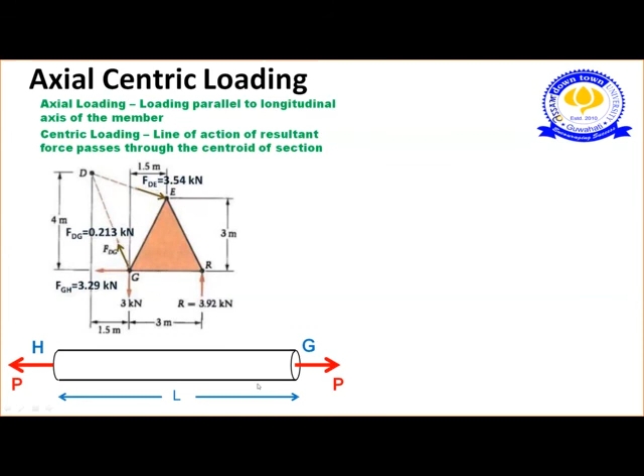In earlier classes, what we have done, we have taken a truss, right? We have taken out the truss. Then we have found out the various forces acting on this surface. You must have gone through this in your engineering mechanics class, how to take out these forces. That I won't discuss now. If later I get a chance, I'll give you some videos on that.

So we are taking a cross section from this truss member, suppose HG, and we are applying axial centric loading, which is our external force. Axial means perpendicular to this direction, and centric means from the centroid of the section. See here, this force is applied on the center. One more thing, centric doesn't mean always it will be from center, it will be from the centroid. A cross section may not have its centroid on its center; based on its shape, different cross sections will have their different centroids.

So we are applying a load from centric loading. Axial centric loading: axial means axially perpendicular to the surface, and centric means from the centroid. So we have applied the load. So this is our member. Now I'm interested in what internal forces will be generated on this cross section when we apply an external load. So first I did a transverse cut.

I have cut the section in the transverse direction, meaning perpendicular to the surface. So this is my transverse cut. So if I want to know what the forces are, there will be one normal force and one shear force. Between this section and this section there will be a shear force, and between this section and this section there will be some normal force.

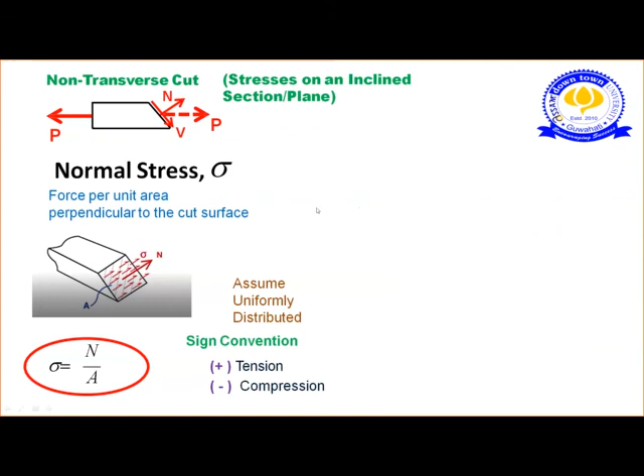And the sign convention: if the forces are in tension, the sign convention will be positive. For compression, this is the direction normally; this generally represents compression, and this represents tension, it is pulling out. So whenever the forces are in tension, the sign is positive. Whenever the forces are in compression, compressing, it will be negative stress. Clear?

Clear? Compression and tension. In truss, whenever you have found out the free body diagram, then the forces in different members, then you must have gone through compression and tension. So hope it's clear now. Any confusion from this slide, or shall I move?

32 participants joined, but no one is saying anything. What happened? Hello? Yes, ma'am. Okay. Only one girl. Okay. So I'll move to the next slide.

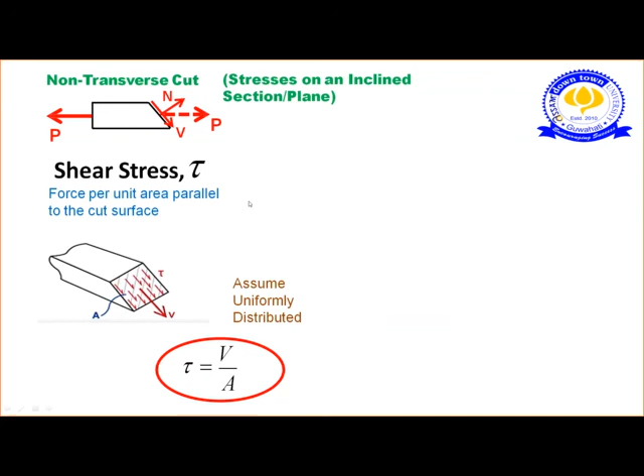So we have discussed the normal stress. Let's move to shear stress. So shear stress is represented by tau. Again, this is the shear stress. Now, if we zoom out the section, this is the shear stress. So force per unit area parallel to the cut surface. When the force is applied parallel to the cut surface, the force is in the direction of the cut surface. That force divided by the cross-sectional area is represented as shear stress, tau.

So tau is basically force per unit area parallel to the cut surface. Shear force divided by the cross-sectional area will give you shear stress. And here also we are assuming that the shear stress is uniformly distributed on this cross section. Or for this non-transverse cut, you can take it as stress on an inclined plane or inclined section also, because the cut section looks like an inclined plane. These two words will help you later on.

So first you have to understand what is normal stress, what is shear stress. Clear? I'll try to find any video on this. I'll share. So note down this question as a homework. Okay. I'll discuss the solution in the next class very briefly, but I want you all to do this one by yourself first. Then we'll match with everyone's answers. Then I'll discuss what problems you faced. Then we'll discuss how to do the solution.

So basically, a flat steel alloy bar has a thickness of 10 mm and a width of 60 mm. It is subject... My screen is visible to you? The worksheet. Hello. Yes, ma'am. Okay.

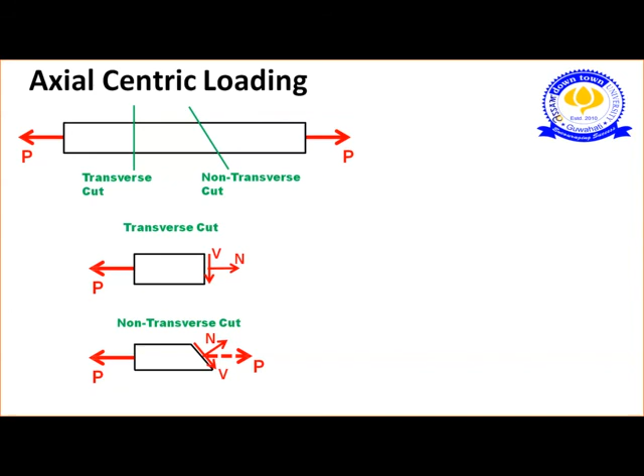A flat steel alloy bar has a thickness of 10 mm and a width of 60 mm. Dimensions of the steel alloy bar are given to you. Thickness is 10 mm, width is 60 mm. It is subjected to an axial centric load in tension of 60 kilonewton. That means your P is 60 kilonewton. Determine the normal stress and the shear stress in the bar on both the transverse plane and the inclined plane. And the ratio of this inclined plane is 4:3.

So please do this worksheet. No issue if you aren't able to solve it, but try. I want to see who has tried, so that I can note down who is doing the class very sincerely. Use your concepts, whatever you have understood in these two classes; basically this is based on today's class.

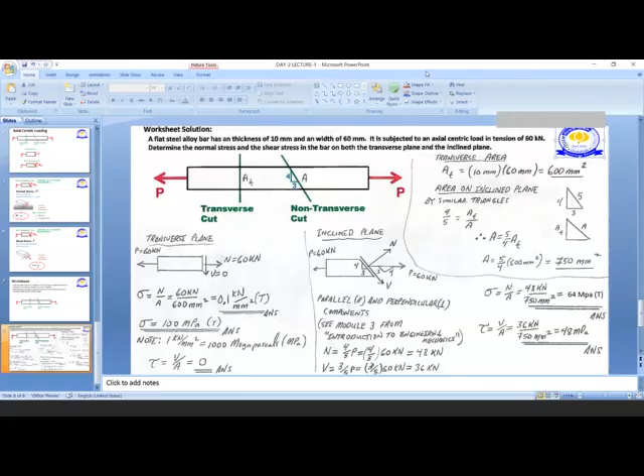This is shear stress. This is normal stress. This is the force. Take the transverse cut from the section and apply equilibrium. P will be equal to N. So it will be easy, I guess. P will be directly equal to N for the normal stress. Then for the shear stress, you have to find N and V from the resultant. Clear? Understood or not? Yes, ma'am. Okay.

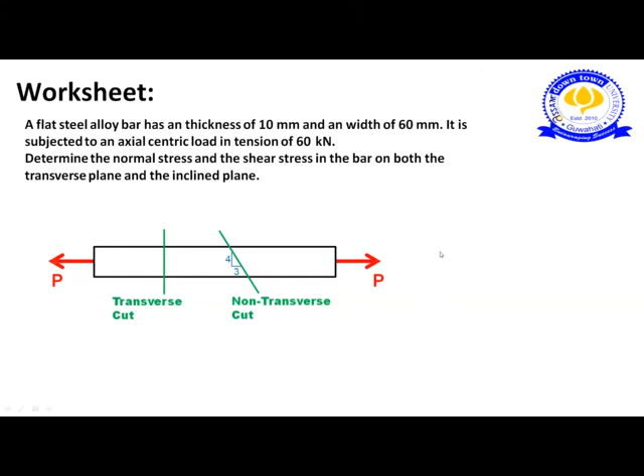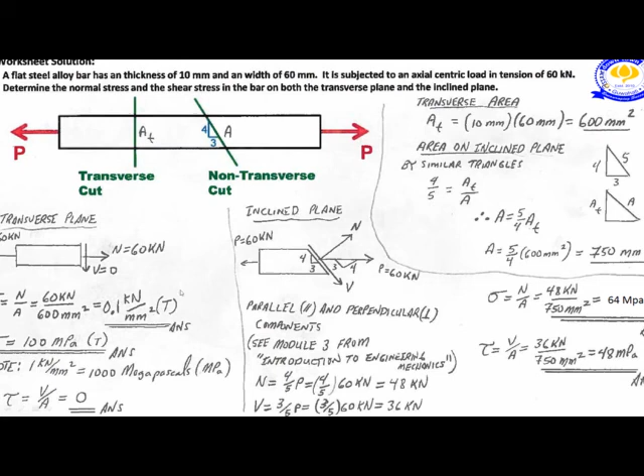Any questions from the last class? Those who were not present, have you noted down the questions? Am I audible? Have you noted down the question? Yes, ma'am.

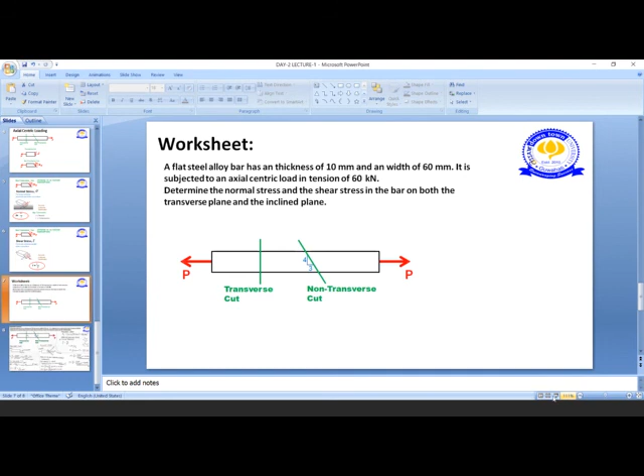Do one thing. We have time. Try the numerical now. We have time, so you can do the numerical. If time permits, I'll share the solution also. Try it once. All of you try in your copy right now. If time permits, I'll discuss the solution also. It will be better. Everyone try.